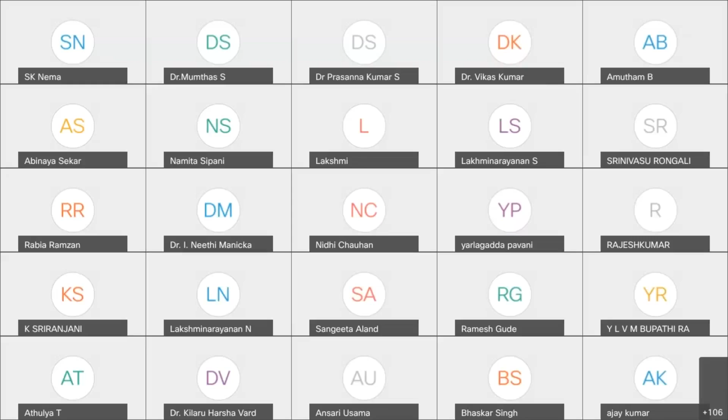They're also generating thousands of tons of tire and e-waste as well as biomedical waste. This quantity is huge in our country, and how to manage this is really a challenge for us. Generally people are dumping it in open dump yards, and you can see mountains of waste have been built.

Like in Ahmedabad, there is the Pirana area, which has a very big mountain dump yard where a large quantity of waste has been dumped. Similarly this is there in Mumbai and other places like Delhi.

With time sometimes it catches fire, and a lot of smoke comes into the surrounding areas, and this can also spread diseases. Whenever this waste is there, it can be the source of many viruses, bacteria and pathogens, and it can spread disease. How to solve it in an environment friendly manner is really a challenge nowadays.

You can see the biomedical waste. These rag pickers are collecting certain things, and they can again bring back certain things into the market, which puts our life at risk. So biomedical waste should also be properly managed and properly disposed of.

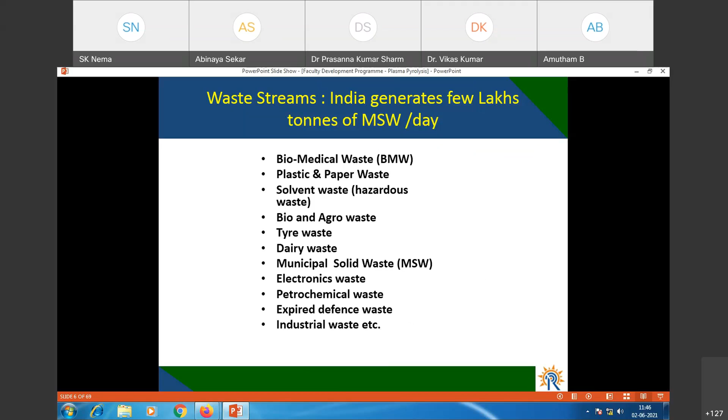So for conventional ways of solid waste management, you can see we are dumping in the open dump yard, and it's a big source of hazard, as well as pathogens, and disease can spread through this kind of open dumping.

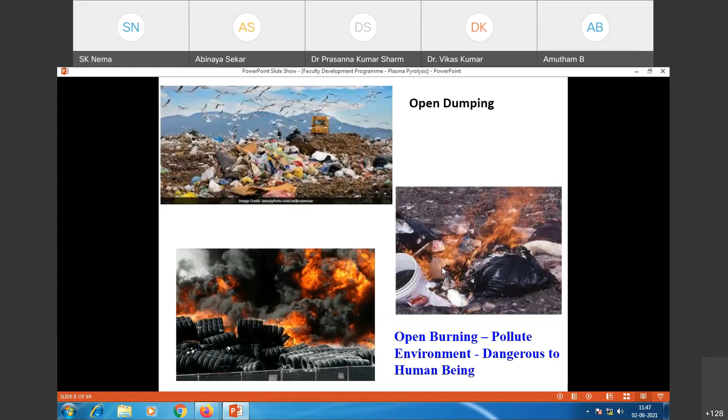People are just putting fire on the waste, and a large amount of smoke and toxic things come out from the waste if you are burning it in the open directly.

In the dump yard also sometimes it catches fire. You can see the Deonar, Mumbai dump yard, where it caught fire in summer, and we always hear about this in the summer - sometimes the Delhi dump yard, or Deonar Mumbai dump yard, or some other places catch fire.

This produces toxic fumes with a lot of aromatic compounds and toxins, and even particulate matter which is very harmful to the nearby society where people are staying or residing. So this kind of thing one has to take care of properly - the waste has to be properly disposed of so that such issues can be solved.

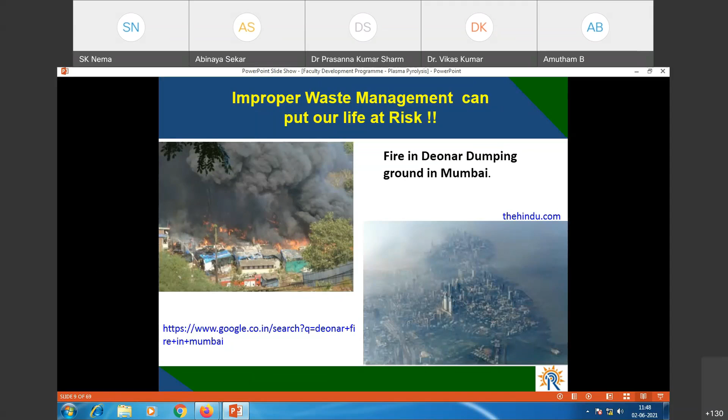You can see very commonly people are using landfills. Engineered landfills are there, where systematically they make landfill sites where the waste is dumped, and afterwards they grow gardens and other kinds of things, so that this kind of open dumping can be avoided.

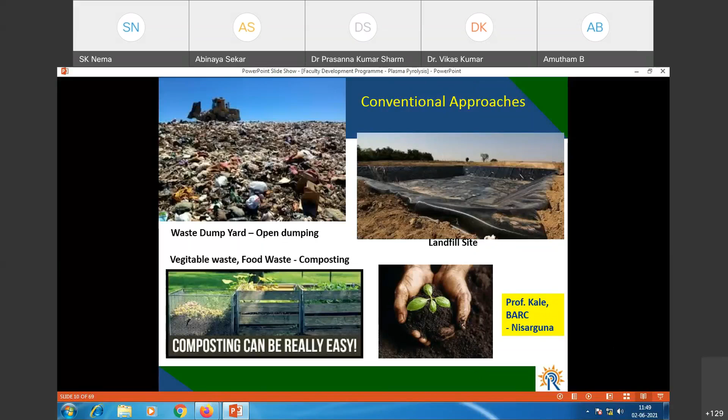From organic things like vegetables and various other materials in the waste, people are doing segregation and composting. This is useful because a lot of organic material can be degraded by useful bacteria through aerobic and anaerobic composting, and used as manure. Whatever compost comes out is used as organic manure, which is very useful, and nowadays organic farming is increasing day by day in the country as well as in the world.

Overall solid waste management rules are made by CPCB, MOEF, and Ministry of Environment and Forest and Climate Change. These are put in the Gazette of India, and guidelines are given for how to take care of different varieties of waste.

For biomedical waste, certain norms are given in the Gazette of India regarding what kind of biomedical waste requires what particular technology. These guidelines are specified in the MoEF's Gazette of India.

Waste management is not only disposal, but starts from the source. You have to collect the waste, transport it to a certain location, then process it. There is moisture, debris, and other things, so segregation is needed, along with removal of moisture if required.

Then you go for recycling - selecting materials like plastics for segregation and recycling. Some materials, like hazardous waste, require proper treatment before disposal.

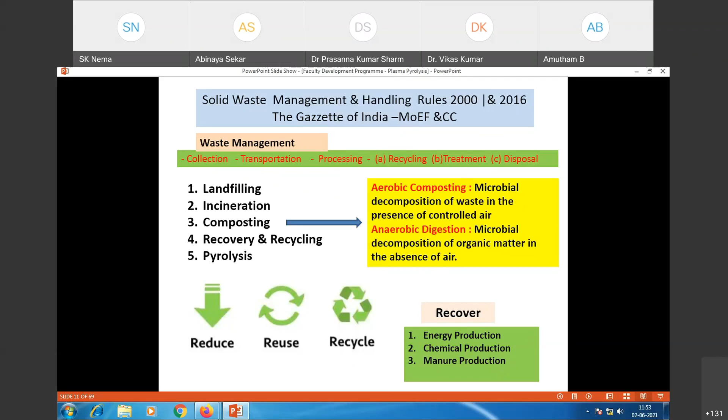By minimizing waste production and recycling, you can recover chemicals and energy, and also produce manure from the waste. This is basically how municipal solid waste processing works.

In municipal solid waste processing, moisture, debris, glass, and metals are segregated, because debris and glass only consume energy if disposed of in an incinerator or gasifier. You need high organic content material to generate useful molecules like carbon monoxide and hydrogen, which are good for energy recovery. If you segregate out debris, glass, and metals, the overall calorific value of the waste increases.

You can see typical proximate analysis of different waste. For mixed food waste, moisture content is about 70%, along with volatiles, carbon, and ash content. This varies depending on the waste selected.

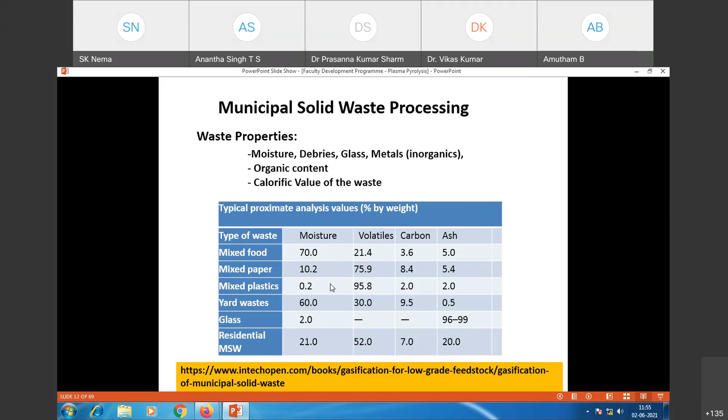For biomedical waste management in hospitals, it starts from production at the hospital and healthcare unit. Waste characterization is done - infectious or non-infectious waste - and packed in different bags: yellow, red, black, and blue. Then quantification is done to determine how much waste is produced, followed by segregation, mostly done at the hospital.

They put the waste in different bags and buckets where different kinds of waste are dumped, which is well defined. The bags are properly sealed and transported in a special vehicle to the disposal site or biomedical waste treatment site.

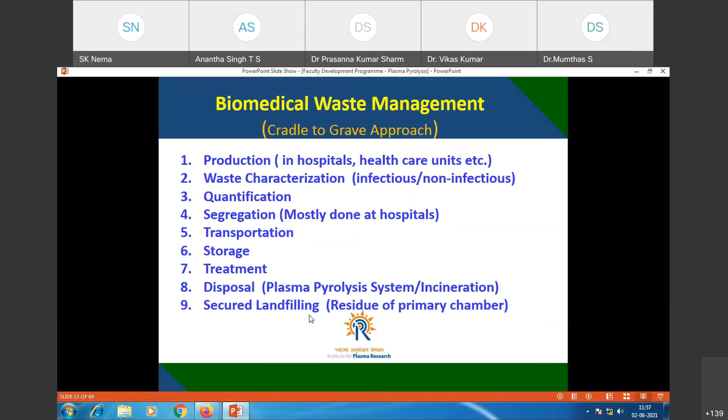So you can see here in biomedical waste, the yellow bag, red bag, blue bag, and white or black bag used to be there. The content inside is well defined, like human anatomical waste, placenta, human body parts, blood, contaminated clothing - they are all part of the yellow bag. Then in the red bag, you can see syringes, catheter, IV, and water, plastic bottles, and those kinds of things. They are part of the red bag.

Gloves, and then bottles and other things like glass bottles used to be there in the blue bag. Then needles without syringes are used to be in the black bag or white bag. Sharps and the other things.

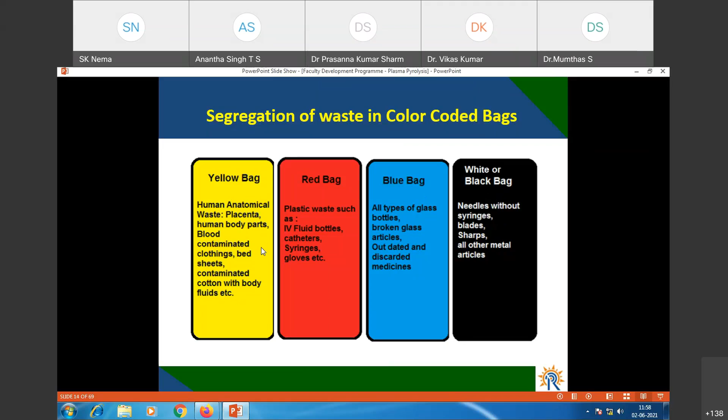So basically, for all these different categories, it's also defined what process should be adopted for different kinds of waste. Like for the yellow category bag, one is to go for incineration or pyrolysis. Then for the red bag, one is to go for autoclaving or a microwave oven has to be used, and then energy recovery is possible. Somebody can think for energy recovery from these plastic things which used to be there in the red bag, so that is possible.

So after sterilization and other things, one can use it. Either they can go for recycling. Shredding is done after shredding of bottles, the plastic bottles and other things used to be done after sterilization, and either it goes for recycling or one can think to recover energy. And there are other ways for glass and other things.

There are also different methods described here. Like one is to go for disinfection, and then afterwards they go for recycling. Sharp and metals also, after sterilization, they go for melting and those kinds of things - reuse, they melt and convert it into some other components.

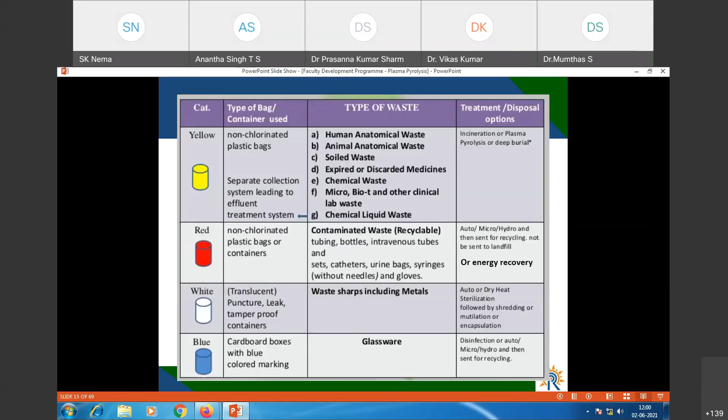So there are certain guidelines that if you want to establish a biomedical waste treatment facility, there are certain rules made that at every 75 kilometers there has to be one biomedical waste treatment facility, and for different categories of waste you have to take care of all the facilities. In that biomedical waste treatment facility, it should not be only disposal or incineration alone, or pyrolysis technology alone should not be there. The complete biomedical waste treatment facility should have autoclave, shredder, and waste disposal unit like incinerator or pyrolysis system, and it should have proper tie-up with all different hospitals.

Proper transportation has to be there, because rag pickers or some people can take out the things and reuse them - things can come back in the market. So to avoid such things, proper tagging is done in the hospital, and not only is it given to the transporter, but these transporters are also registered people, and their van which is moving in the city is also monitored. These people are able to see where this waste-containing vehicle is, so they can locate the vehicle.

So all systematic things are now being used in the country. This is going on and getting established very fast in the entire country, and now people are becoming more aware about such harms from biomedical waste.

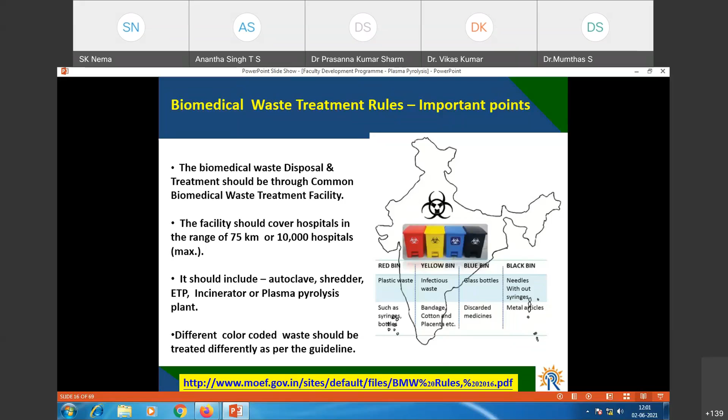You can see here one incinerator plant that is properly managed, and you need to have a lot of garden and trees and other things so that it should look good, and incineration is done. If incineration or pyrolysis system is there, it should be done properly - it should not release toxic things into the environment.

So this is the van carrying the medical waste, and autoclave and shredder are part of this biomedical waste disposal facility. And finally, whatever residue remains should be dumped in the sanitary landfill - it should not be dumped in the open. So whatever residue is there is systematically disposed of.

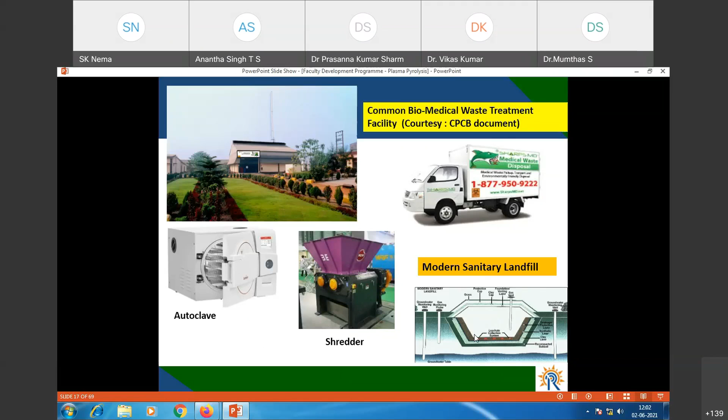Let us come to the conventional approach - incinerators have some problems because large amounts of waste are dumped inside, and burning takes place in the primary chamber where excess amounts of air are fed inside the reactor. Because of this excess air, the overall temperature in the incinerator used to be low, typically 300 to 700 degrees centigrade. When large amount of air is introduced in the primary chamber, it generates direct burning of the waste.

This gives you a lot of polyaromatic hydrocarbons, dioxins and furans, which are cancer forming. These dioxins and furans are extremely toxic and cancer causing. Particulate matter and a lot of NOx also form, and they are all environment polluting. These kinds of things are not acceptable.

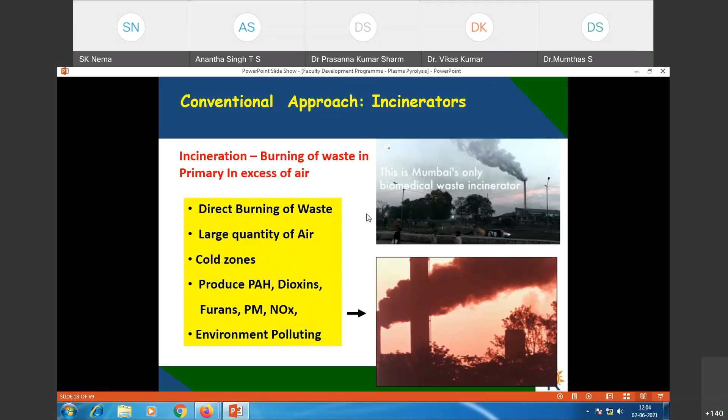As per the recent guidelines of the Ministry of Environment and Forest, such incinerators should be banned completely, and properly designed incinerators should be used. Proper engineering design has to be there, maintaining proper temperature in the primary chamber. In the secondary chamber, they have to maintain proper temperature of 1050 plus minus 50 degrees, and the residence time of the gases in the secondary chamber should be about 2 seconds. All these things should be properly followed so that toxic compounds do not come out into the environment - these are the mandatory norms for biomedical waste disposal.

Similar toxic aromatic compounds form even in conventional incinerators or gasifiers where municipal solid waste, MSW, is disposed of. If proper conditions of temperature and residence time are not maintained in the reactor, they also generate very toxic compounds like chlorophenols, and these chlorophenols combine to form tetrachloro TCDD. This is an extremely toxic aromatic compound and causes a lot of problems to human beings.

You can see a lot of things come out from incinerators that are very harmful to human beings, affecting different parts of our body. Therefore this improper waste disposal is not acceptable at all, and there was a necessity to develop a technology - plasma based technology - which can provide an environment friendly solution.

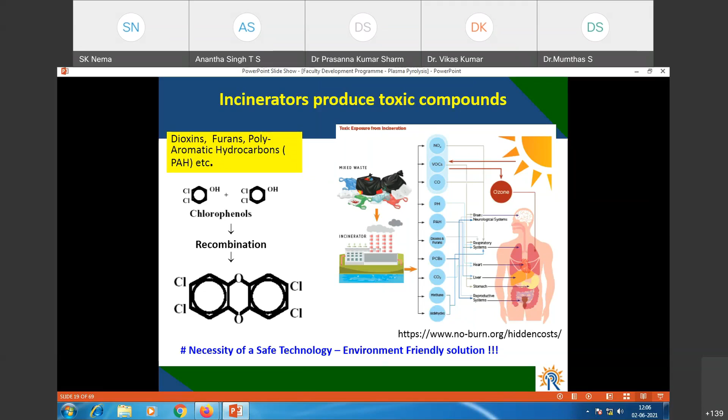Let us understand how the chemistry takes place. In incineration, you are directly burning the entire waste, introducing large amounts of air in the reactor. In the case of pyrolysis, you are heating the waste and converting it into small molecules like carbon monoxide, hydrogen and methane, which you can then burn or use properly. Pyrolysis is basically thermal disintegration of organic mass in an oxygen-starved environment.

In the case of combustion, you require the complete stoichiometric amount of oxygen, and combustion is an exothermic reaction. In the case of gasification and pyrolysis, a lot of endothermic reactions take place, requiring heat in the beginning, but the quantity of gases that pyrolysis provides is very useful. Once you burn these gases, you generate large amounts of energy from their combustion.

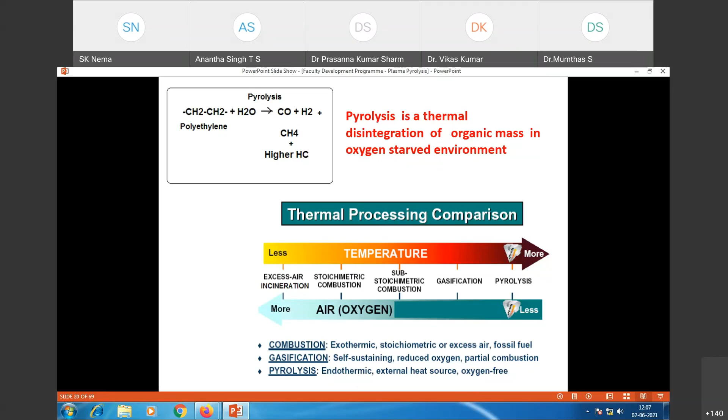So let us understand now the plasma pyrolysis and gasification. This is an ideal technology for waste disposal and energy recovery. So we will understand that part. So let us understand first plasma.

This is the fourth state of matter, the most active state of matter. Basically by either generating very high temperature or generating high voltage between two electrodes, you can separate electrons from the atoms and ionize the entire gases. So to generate plasma in the lab, you need to separate electrons from atoms either by high temperature or by electrical means.

You can generate high voltage, a high voltage gradient between two electrodes. One is the grounded electrode, the other is at very high voltage, and this can happen either in vacuum or at atmospheric pressure. The electrode geometry plays a very important role. So you can generate plasma, the ionized gas.

These are different examples of plasma. The sun is in the plasma state where a lot of fusion reactions are going on - hydrogen is fused and helium atoms are formed, releasing large amounts of energy. Aurora is there, and lightning, where again very high voltage, millions of volts, is involved - lightning is one example of the plasma state.

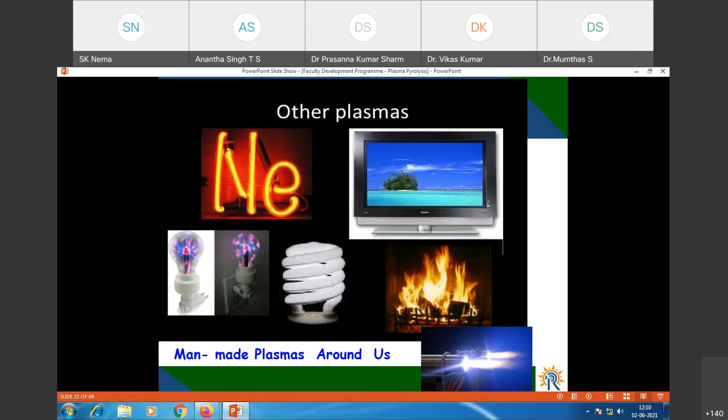We generate this plasma in the lab, and plasma TVs, neon bulbs - they're all man-made plasmas. These plasma torches can generate high temperature. So these are different examples, and you can divide these plasmas into two types for application purposes.

This is high thermal plasma, where a plasma torch generates this plume, where at the core the temperature is of the order of 5,000 to 10,000 degrees centigrade, and at the periphery the temperature is around 2,000 degrees centigrade. This high temperature plasma is used for waste disposal and metallurgical applications.

This is non-thermal plasma, where what you see inside a tube light is plasma - gas is in the plasma state, where electron temperature is much higher than gas temperature, and overall it remains at room temperature. You can touch the tube light. This cold plasma is used for surface modification applications.

You can apply high voltage, low current power supplies to generate this plasma. Here, high current, low voltage power supplies are used to generate thermal plasma, and special plasma torch designs are very important - electrode configuration plays a very important role in generating these kinds of plasmas.

In the plasma, there are active radicals, high energy tail electrons, microscopic electric fields, and UV radiations. These kill microorganisms and pathogens. If this is at high temperature, it can degrade material very fast - within no time, it degrades organic molecules into small hydrogen, CO, and methane kind of things.

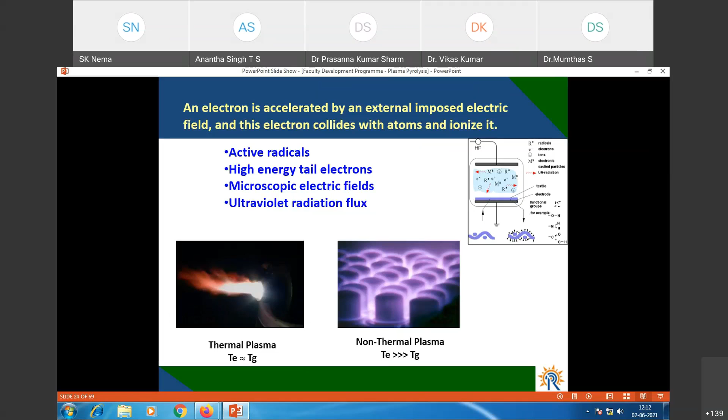These cold plasmas are mainly used for surface modification of polymers and metals, like plasma nitriding which modifies steel and makes the surface hard. It is also activating the surface of different polymers and textiles to give you different useful materials.

So I'll be focusing mainly on these thermal plasma applications - plasma pyrolysis as an ideal technology for waste disposal. The important thing is hazardous and toxic compounds do not form, or even if something is there in the waste, they are completely broken down into elemental constituents at high temperature. This is one important reason that at high temperature you have better control on dioxin and furan.

So what we observe in many of these cases is that when proper temperature is maintained and an oxygen-starved environment is there, the toxins always remain much below the limit set by the Central Pollution Control Board. For dioxin and furan, they have set 0.1 nanogram per meter cube as the toxic equivalent quotient limit.

With plasma technology, several experiments were done, and even worldwide a lot of experiments were done on this. They observed only about 0.01 nanogram kind of levels being generated, so they are well within the safe limit. Therefore this technology is becoming popular for hazardous, plastic, and other waste disposal, as well as for recovering energy through proper use of gasification or pyrolysis.

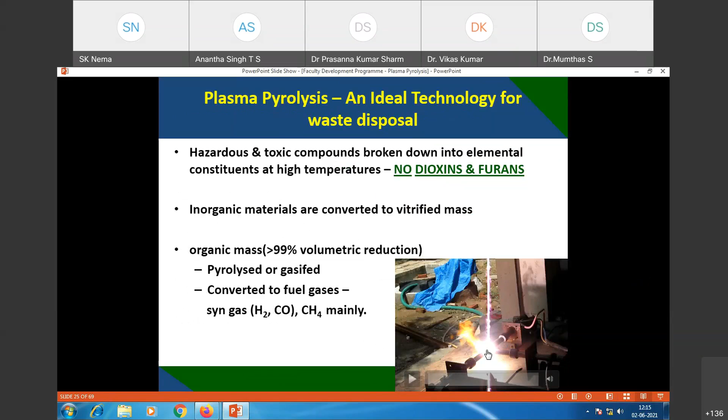This is graphite arc. This was the graphite arc based system, where extremely high temperature plasma is generated. The temperature we could measure here was 20,000 degrees centigrade in the white part of this arc.

This is another plasma torch which we have developed. This is a nitrogen based plasma torch, where nitrogen is flowing between the electrodes and this plume is coming out, and this torch is the workhorse. This is the very important device, torch and power supply, which gives you very high temperature.

In the absence of oxygen, you can generate high temperature, with many advantages. This torch provides extremely high temperature. Its conversion efficiencies, electrical to heat conversion, are very high, around 90%, more than 90%. Plasma torches provide extremely high temperature, high directed energy flux, and generation of heat independent of chemistry. You don't require air or other things for burning the fuel.

Unlike conventional burners, where fuel requires air or oxygen, here in any gas you can generate plasma, and in the graphite arc system you don't even need gas. So you can generate a plasma plume with fast heating at 5000 Kelvin in milliseconds. Fast quenching is also possible; you can switch off, and 10 to the 6 Kelvin per second is the quenching rate.

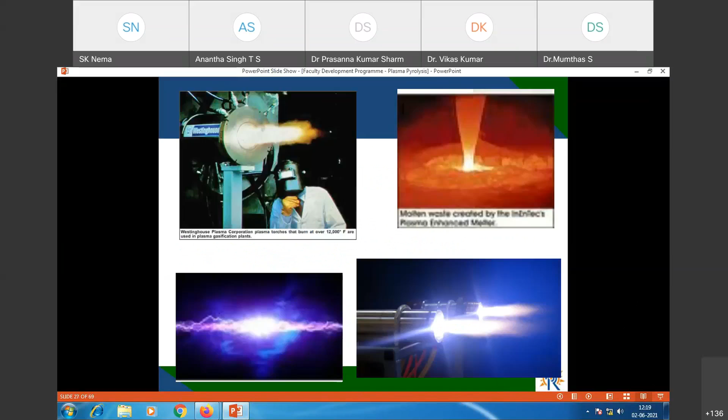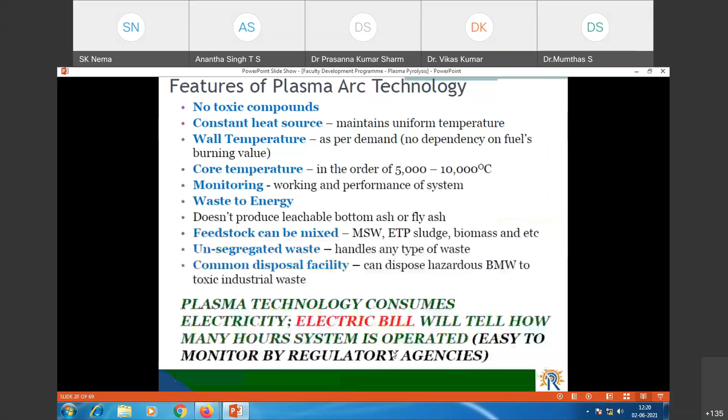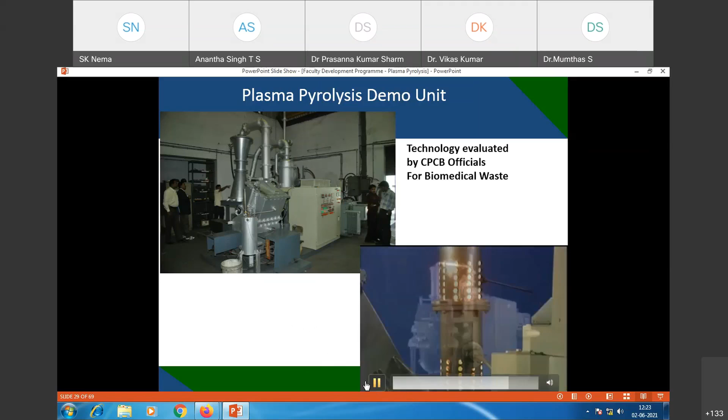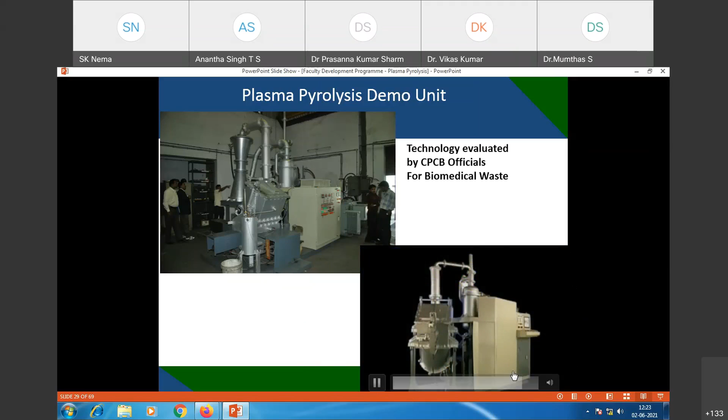Okay, so basically, this was a small movie on plasma waste disposal of biomedical waste, and we have measured emissions in the exhaust, and you can see all the emissions used to be under control. This dioxin and furan should be in the range of 0.1 nanogram and those kind of things. So these are the standards, and we have obtained all the results well below whatever the prescribed norms are.

This, in another slide, I'll be telling you. So here, the CPCB in the Gazette of India have mentioned that primary chamber temperature should be 800, secondary chamber temperature should be 1050 plus minus 50 degrees centigrade. Residence time in the secondary chamber should be 2 seconds, and combustion efficiency should be 99.9%. The chimney height should be 30 meters from ground level.

And these are the standards for different gases. Particulate matter should not be more than 50 milligram per meter cube. NOx should not be more than 400 milligram per meter cube. Similarly, HCl should be less than 50 milligram per meter cube, and that's included. So, for the ash, it should be vitrified, or it should be dumped in a secured landfill.

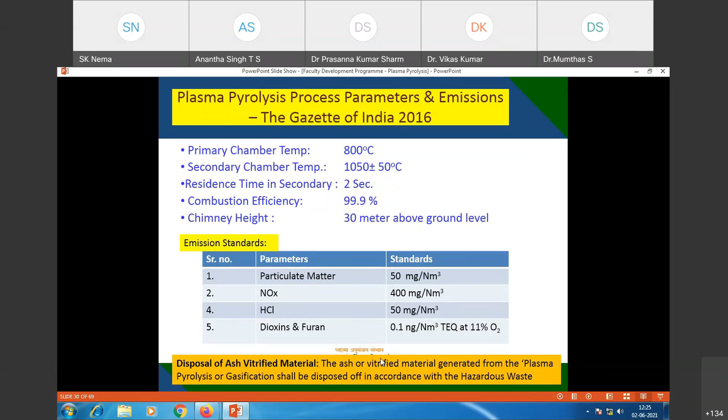Unlike incinerators where large amounts of air are fed into the primary chamber, and air has 80% nitrogen, which gives you cold pockets. So this large amount of air is one culprit, along with the lower temperature in the incinerator. That is completely taken care of by the plasma-based system. The temperatures are high, and you are not adding air into the system.

Then in the secondary chamber, we maintain a long plume, and whatever gases are present, they also help. Combustible gases that are forming also help in the secondary chamber. You get a long plume in the secondary chamber, and are able to maintain high temperature. This high temperature takes care of complete disposal of the waste, and gases are converted into carbon dioxide and water vapor.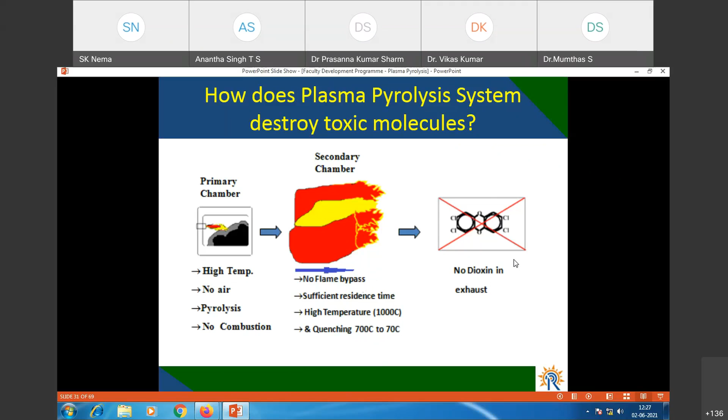You can see here the dioxin destruction kinetics. It tells you that if your temperatures are properly maintained everywhere in the reactor, then you can completely destroy dioxin and furan.

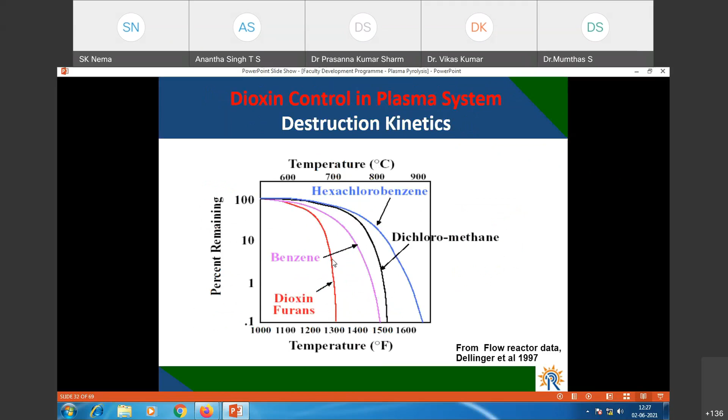In the world, many companies are working on this, like Plascon, Plasmox, Retech, Peat, and also Pyrogenesis in Canada, and Alter NRG Corporation, Westinghouse. They have been working since 1990 onward. A lot of work is going on in plasma-based pyrolysis and gasification for energy recovery from waste.

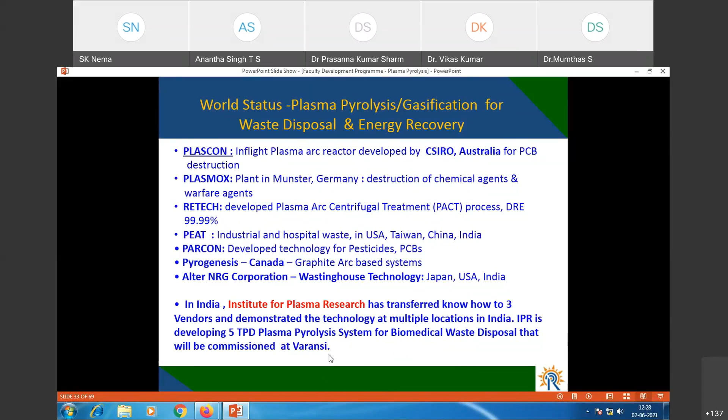In India, the Institute for Plasma Research took initiatives in 1998, and a lot of work has been done since then on biomedical waste. Right now, the Institute is developing a large 5 ton per day capacity plasma pyrolysis system, which is going to be commissioned at Varanasi in about 1.5 years.

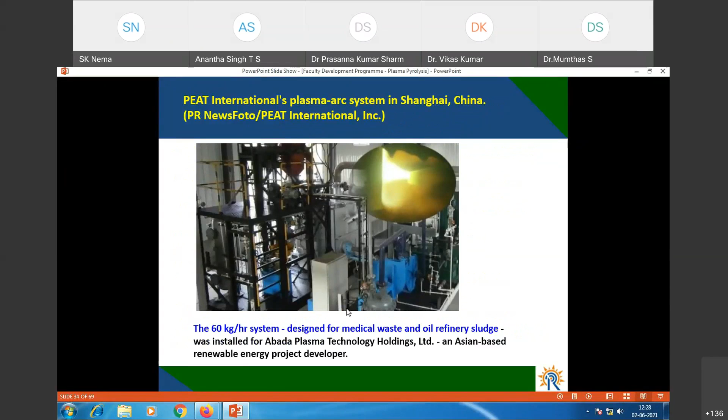Syngas, hydrogen and CO formation is there. Other hydrocarbons are also formed. You have to control the soot particles, which should be within the limit. NOx and SOx should be taken care of by your gas cleaning system, and your chemistry has to be such that you minimize the formation of these things, as well as take care of them in the second gas cleaning system.

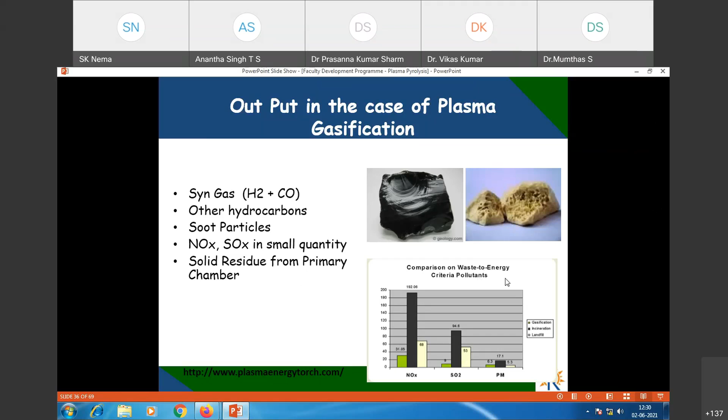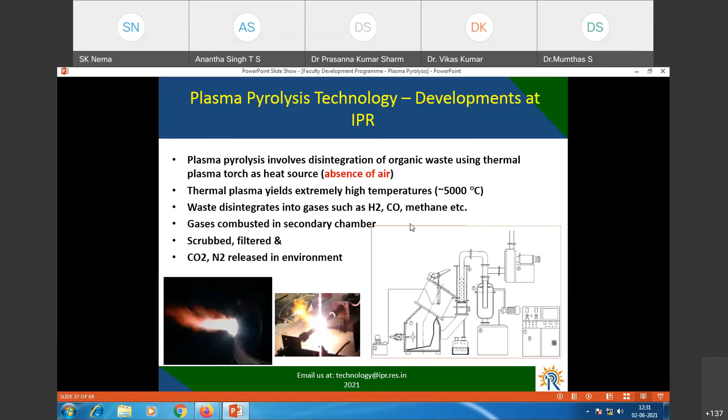So basically, you can see this plasma pyrolysis system which we have developed. This is again the primary chamber, all those things you have seen, and we are using it for biomedical waste as well as other waste. We are converting it into useful gases.

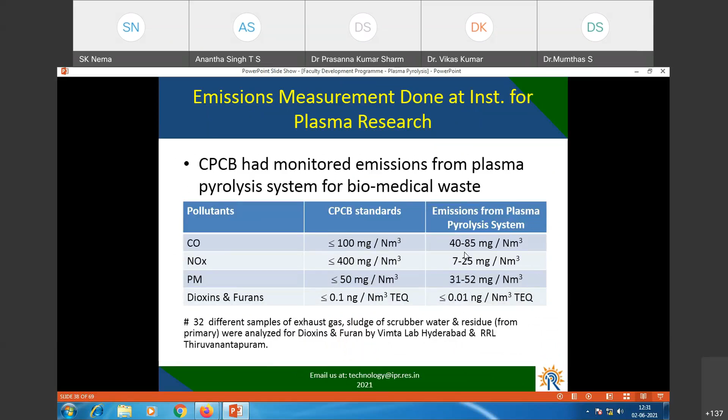These emissions, you can see what emissions we have measured in our system here. This is the CPCB standard, where CO, NOx, and particulate matter limits are given, and what we are getting is everything under control, within the limit set by the Central Pollution Control Board.

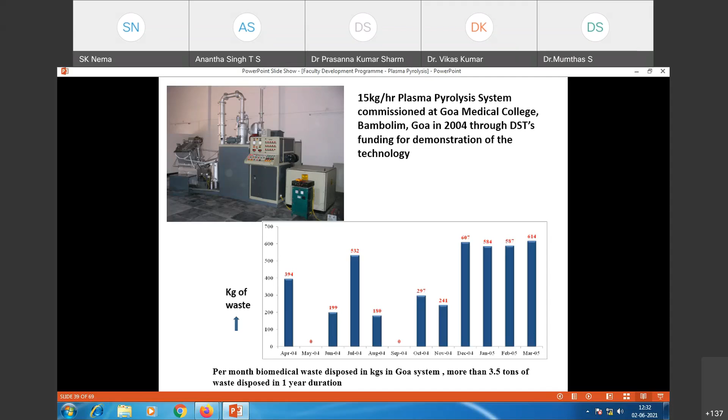The technology has been included in the Gazette of India. Plasma pyrolysis technology is recognized for safe disposal of biomedical waste, and this is a part of the MOEF gazette.

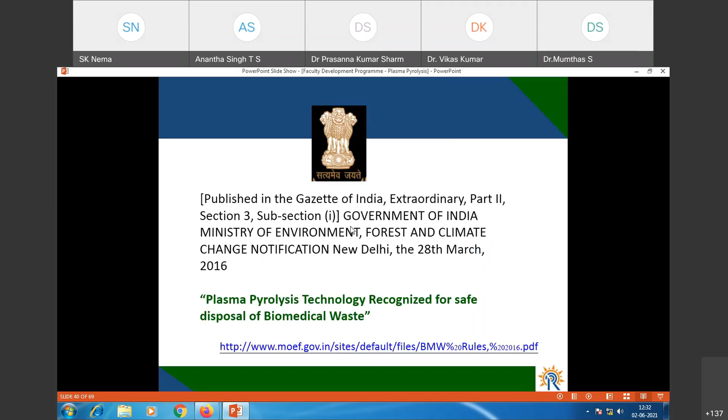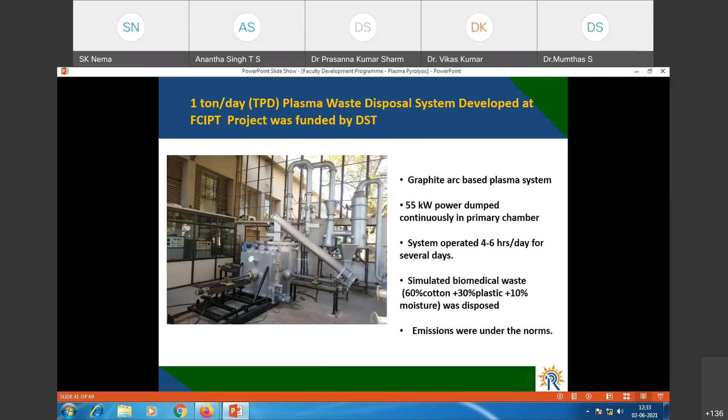This is a bigger size, 1 ton per day system at FCIPT, the Facilitation Center for Industrial Plasma Technology. We are using it for a large number of experiments, disposing of a variety of waste streams using plasma and getting useful gases like CO, hydrogen and others. We have also demonstrated energy recovery in this system.

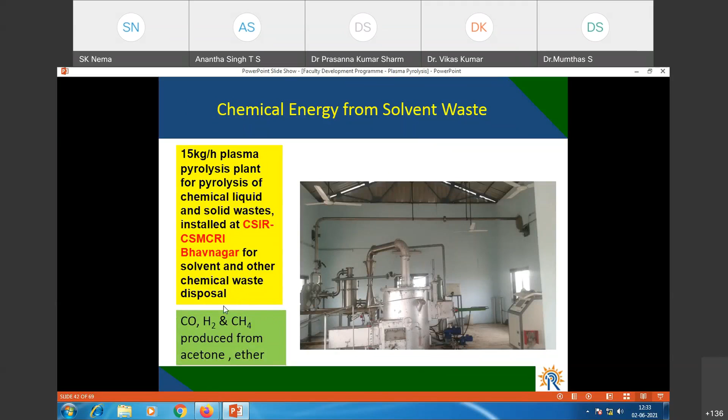This is one system we have commissioned at CSIR-CSMCRI Bhavnagar. We are using it for different solvent waste as well as solid waste, and getting CO, hydrogen, and methane, so you can use these gases for energy recovery.

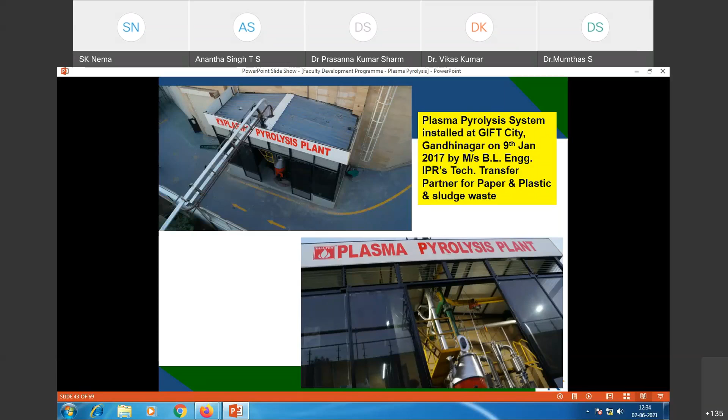This was one system our technology transfer partner, M/s BL Engineering, commissioned at Gift City, Gandhinagar. It's a very compact system for disposal of about 150 kg waste per day. This was before they go for a bigger system; they wanted to have one compact system and do trials with sludge and waste coming from Gift City, Gandhinagar.

Now at Varanasi, we are developing one common biomedical waste treatment facility completely, which will have everything, operated by some vendors, so vendor selection is going to be there. Different steps are involved: a 200 kg per hour plasma pyrolysis system is going to take care of about 5 ton per day, with autoclave, shredder, effluent treatment plant, everything included. This system is going to operate, maintained by some vendor, continuously for a few years.

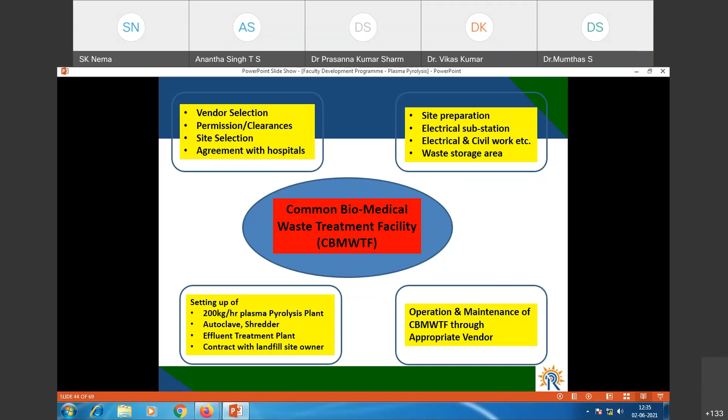This was successfully demonstrated for about 2 years. Then the administration, with Cancer Hospital Varanasi, Homi Bhabha Cancer Hospital Varanasi, their administration will take over the entire thing, and they will run and operate it.

These are certain parts: this is the primary chamber, and here is the feeder, for the 5 ton per day capacity system. So for this 5 TPD system, a lot of work is going on here, and in about 1.5 years this thing is going to be ready, and it will be shifted to Varanasi.

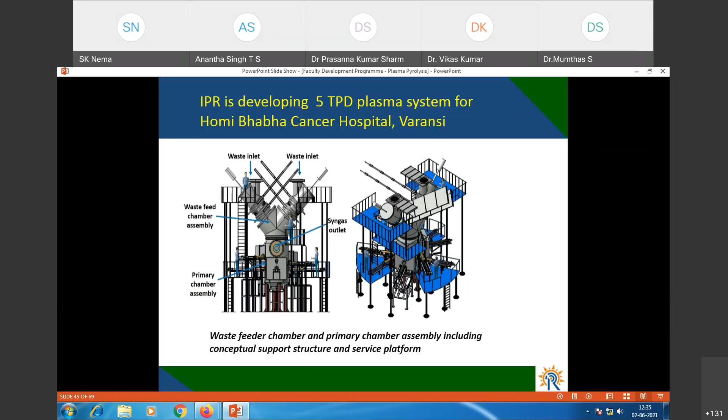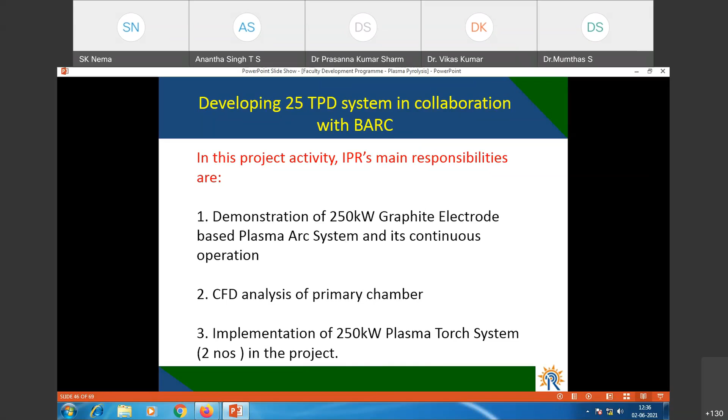IPR, Institute for Plasma Research, is also developing one, collaboratively working with BARC, for a 25 ton per day capacity system, and we have got some responsibility. We have to carry out the demonstration of a 250 kilowatt graphite arc-based plasma arc system and its continuous operation, then CFD analysis of the primary chamber and secondary chamber, and the implementation of the 250 kilowatt torch in the project. So this is a collaborative project with BARC and Institute for Plasma Research working together for this very high capacity system, which is going to be used for municipal solid waste disposal and energy recovery.

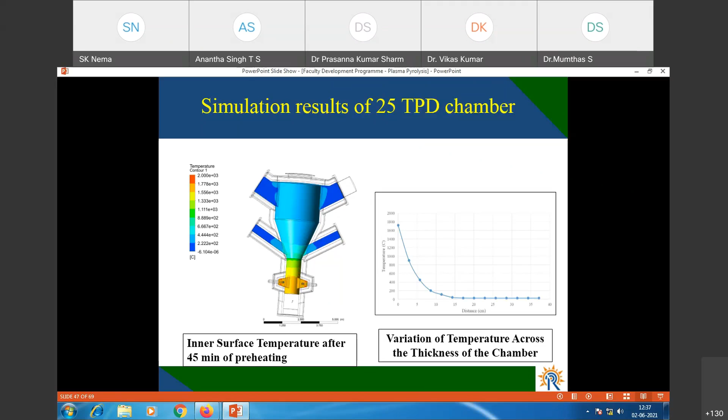These are some of the analysis work done, showing how the temperature profile is going to be there, with overall outside and inside refractory lining proper. Different compartments are there: compartment A, B and C. The refractory lining inside the reactor is very crucial so that you can maintain the temperature in the hot zone. The temperature profile should be properly maintained so that you do not form toxic things, and you can convert waste into useful gases rapidly, working in gasification mode.

Again, this temperature profile is telling you the outside temperature is going to be lower. So when the system is running, the outside metal temperature should be room temperature or slightly above room temperature, less than 50 to 60 degrees centigrade.

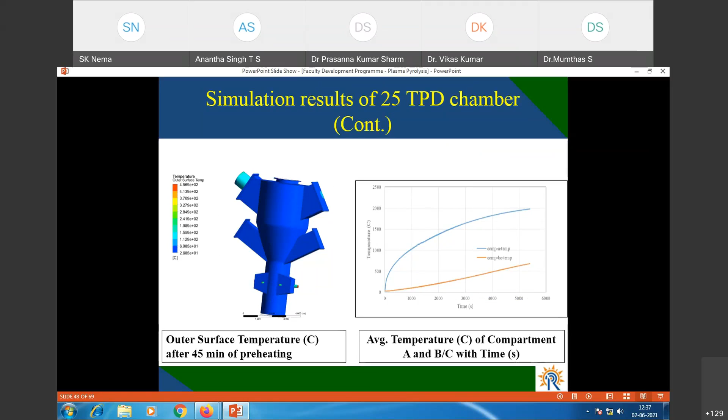So you can see here the advantages. Plasma arc gasification systems are more beneficial, producing large quantity of power, kilowatt hour per ton of MSW. This clearly demonstrates that plasma arc systems have superiority over simple incinerators. Incinerators produce only about 544 kilowatt hour energy from one ton of waste like MSW, whereas plasma arc produces 816 kilowatt hour, about 50% higher.

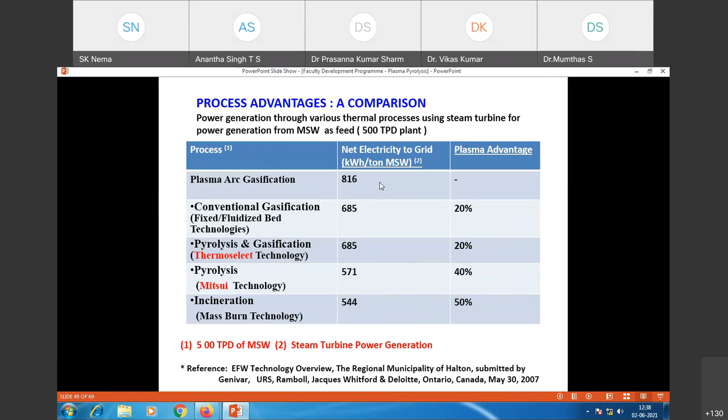And this is done in a 500 ton per day capacity plant.

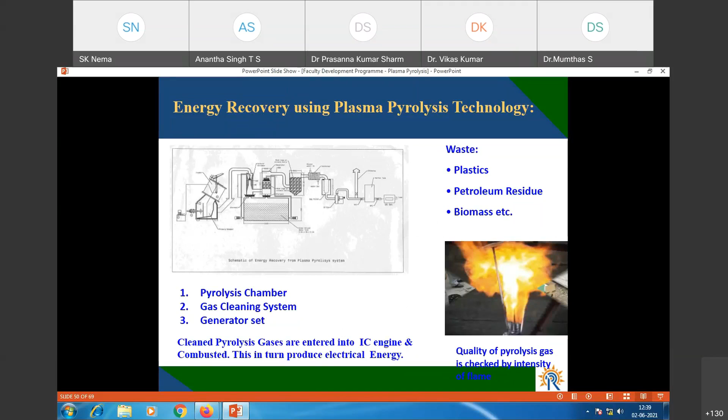You can see gases formed from pyrolysis. Simple polyethylene was pyrolyzed, and we got about 28 to 48% hydrogen, carbon monoxide and methane, 15 to 20% methane, along with some higher hydrocarbons and other things.

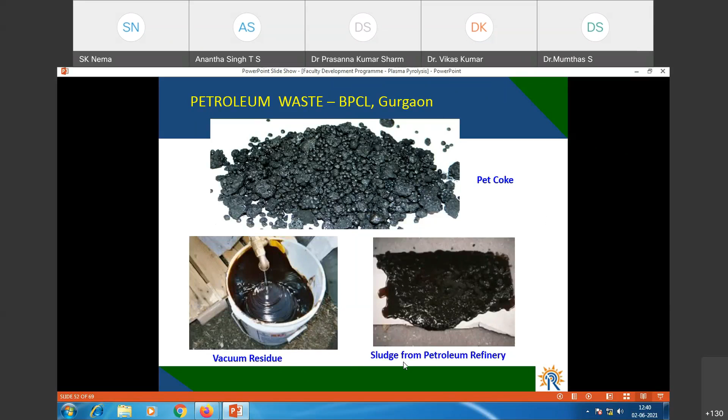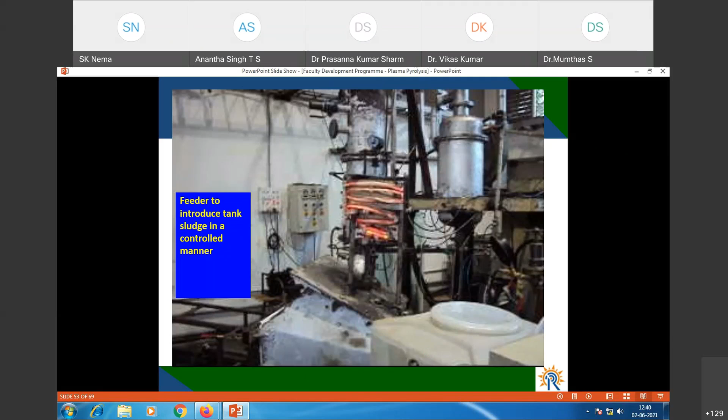These various petroleum products we could pyrolyze and generate carbon monoxide. This gasification was done for different petroleum products: petcoke, vacuum residue and sludge, and we could demonstrate carbon monoxide and hydrogen syngas formation from these, with vacuum residue giving the highest amount of hydrogen and CO. From vacuum residue we got about 85.4% of syngas, which was the highest.

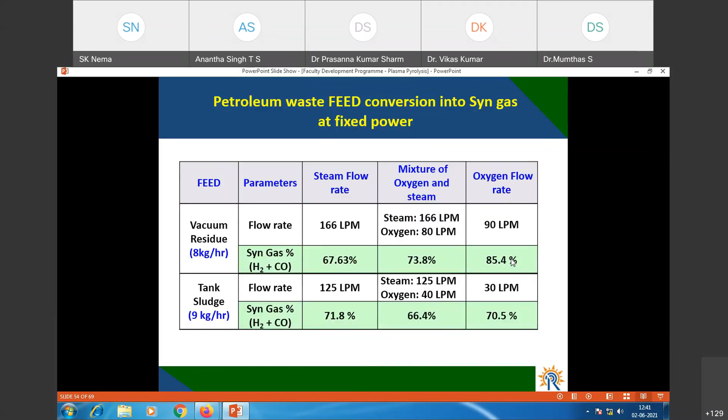With plasma gasification, using the feedstock, initially you are removing moisture, and afterwards the waste is broken into char and volatiles. Then in the presence of plasma, if controlled oxygen is added, varying the equivalence ratio from about 0.25 to 0.5 in substoichiometric ratio, you are able to generate these different useful gas molecules in plasma gasification.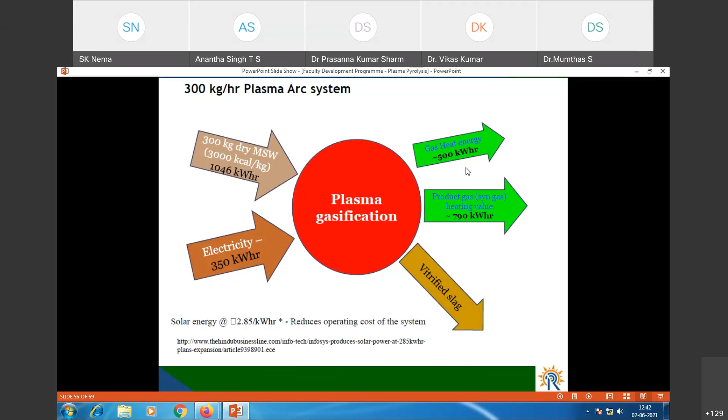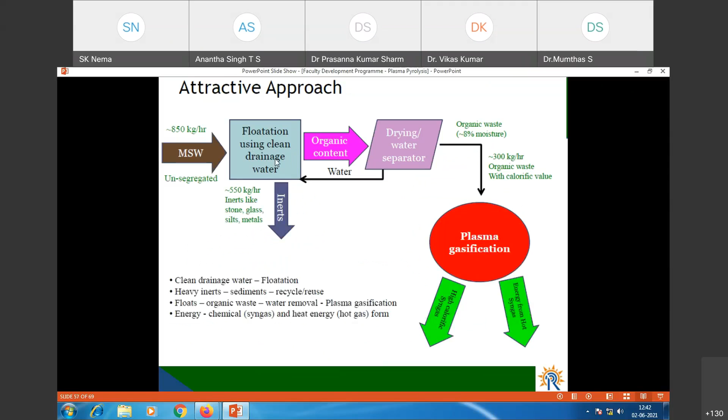And this is another approach where you remove the debris and other things, and remove the moisture content here, then again use it to recover energy from the waste.

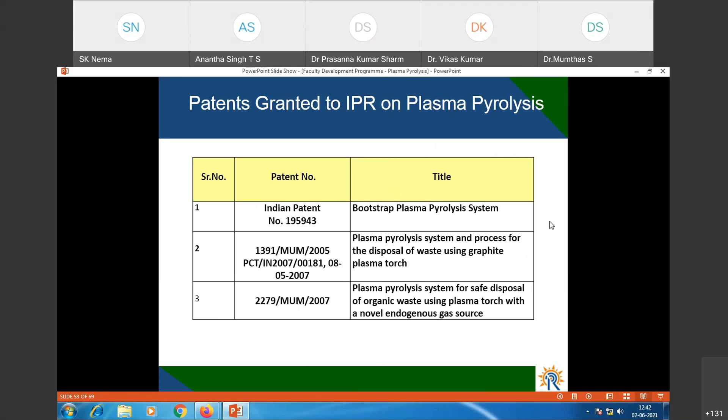These are some of our patents in plasma pyrolysis technology, and we have transferred this technology to BL Engineering, Bhakti Energy Rajkot, GP Green Energy System Kolkata, and for biomedical waste we have recently transferred to Messrs. Ankur Scientific Private Limited, Vadodara. These are all non-exclusive technology transfers to different people.

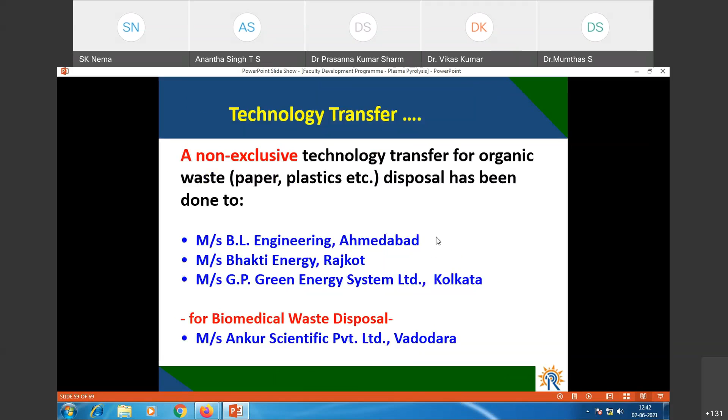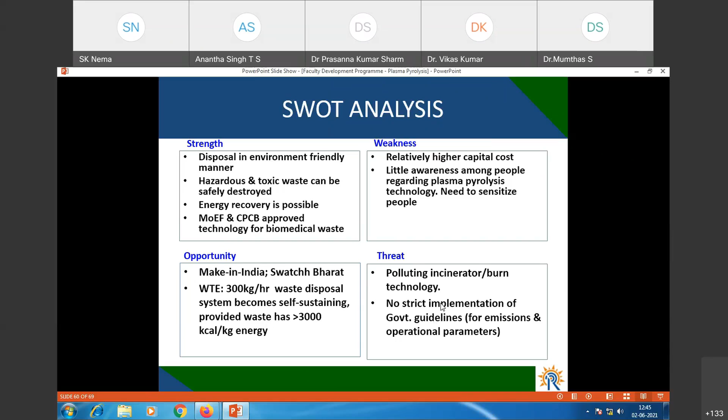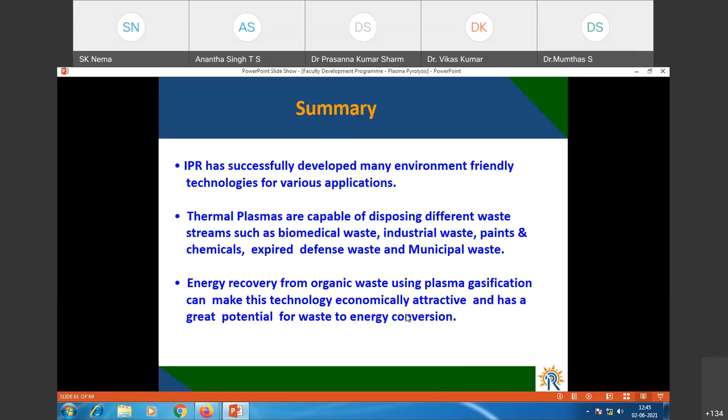I'd like to summarize that IPR has successfully developed many environment-friendly technologies, and thermal plasmas are capable of disposing different varieties of waste streams. We have demonstrated biomedical waste and petroleum waste, and one can even take care of paint and other chemicals. Expired defense waste can also be safely disposed of in the plasma system. Energy recovery from organic waste is possible, and you can use the plasma gasifier to recover energy. This technology definitely has a great future.

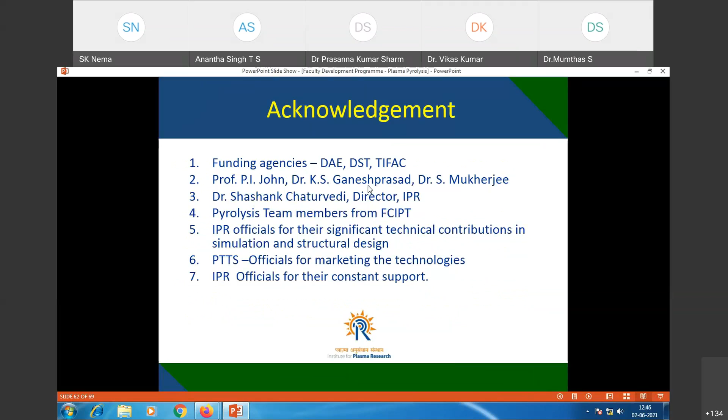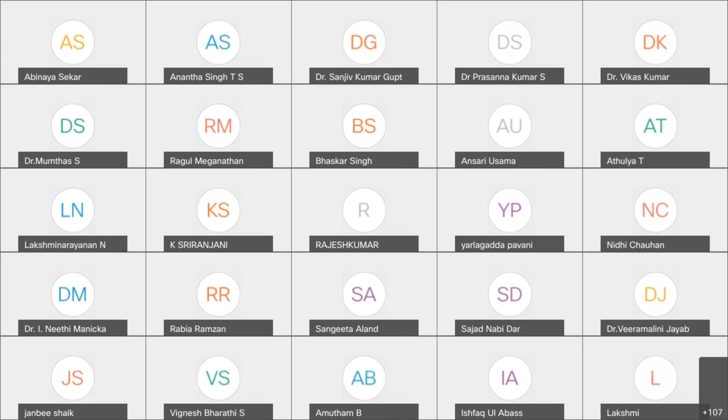Thank you. This is Lakshmi from Anand Institute of Biotechnology, Chennai. I had completely attended the session, but there wasn't any poll. Since you've introduced it now, I was a bit confused whether there was any poll - last section we didn't have any poll. We have retrieved the attendance from WebEx. Thanks, sir.

Attendance about yesterday? Sir, we have retrieved the attendance and we are thinking whether we have to disclose it or not, because we are still cross-checking with the WebEx data. After that, we will try to update it.

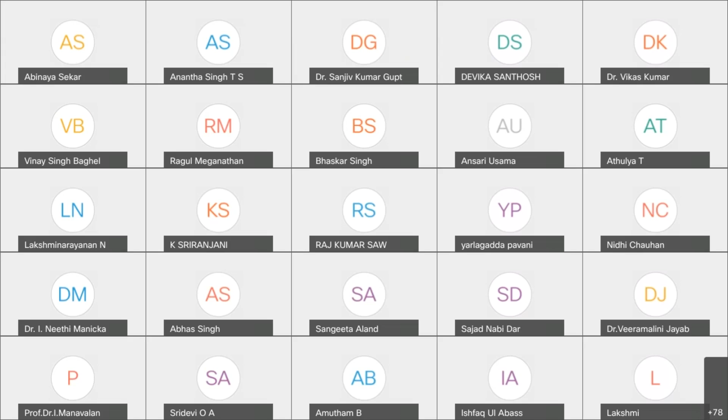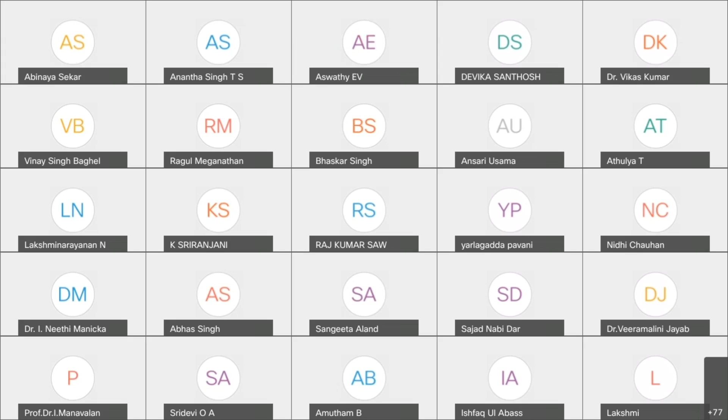Sir, can we have a Google Classroom for this program where you can share the resource persons' presentations? Mr. Lakshmi Narayanan, we have asked a few experts about sharing their presentations, but to be frank, they are not ready to share. They said whatever recording is there, you can go ahead with the recorded session - that is fine to share with the participants.